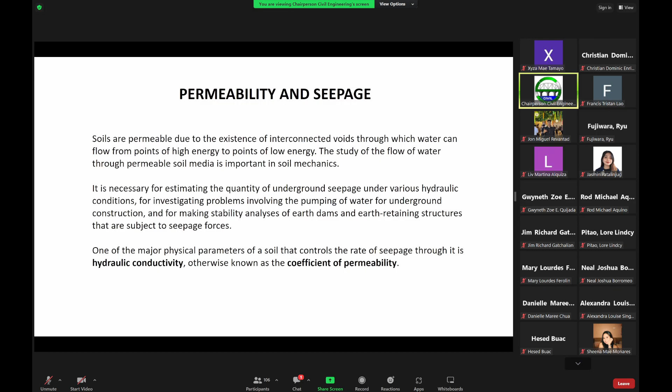Now, from fluid mechanics, we know that according to Bernoulli's equation, the total head at a point in water under motion can be given by the sum of three terms or parameters. It should be the sum of the pressure, velocity, and elevation heads, such that the total head H is now equal to the pressure head, the velocity head, and the elevation head.

So the pressure head is equal to the pressure over the unit weight of water. And then the velocity head is equal to the velocity squared over 2 times the acceleration due to gravity, plus the elevation head.

So again, if you have the book, I just copied this from the book, so you can refer to your book as well if you have difficulty with my presentation. I'm just practically going through the book as I speak. So here we have to take note that the elevation head Z is the vertical distance of a given point above or below a certain datum plane. For example, when we talk of ground elevations, when you did your surveying subject, normally the field ground elevations is based from the sea level as our datum plane.

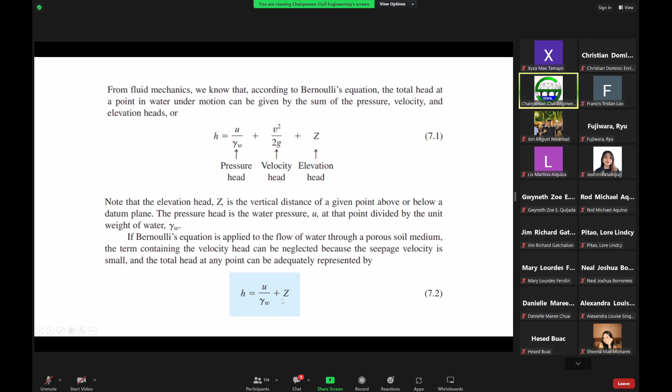So if you're talking of the ground, this is now the pore water pressure head over the unit weight of water, plus the elevation head.

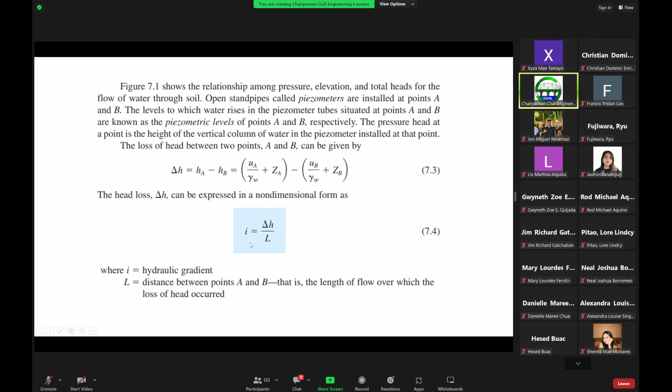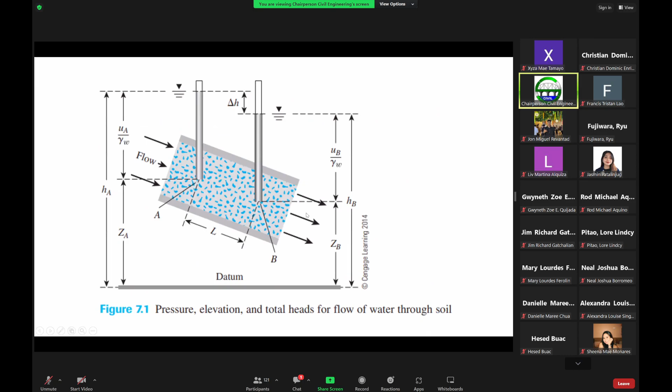When we say laminar flow zone, you can probably visualize this like a very calm creek that is flowing—that's laminar flow. When we say turbulent flow zone, you can imagine rivers where you have rocks and so on, where you have turbulent flow.

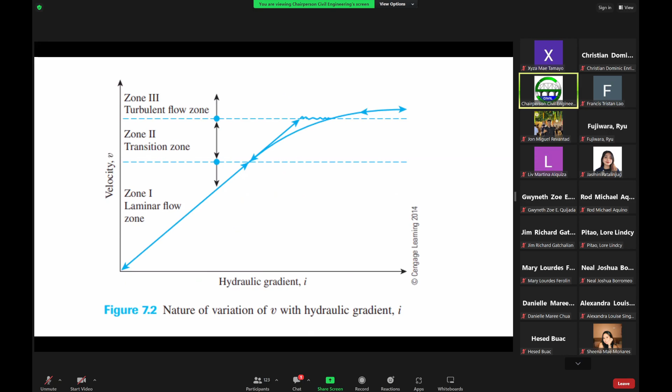Now, I think we learned from ratio and proportion that if we have the proportionality sign, and we replace this by an equal sign, then we have to introduce a proportionality constant. So that's why in this equation, if we want to relate the discharge velocity within the pores of the soils...

...if we equate the discharge velocity to the hydraulic gradient, recall that the hydraulic gradient is the ratio of the head loss over the length to which the head loss has occurred.

So V here is the discharge velocity, which is the quantity of water flowing in unit time through a unit gross cross-sectional area of soil at right angles to the direction of flow. And K here is what we call the hydraulic conductivity, or otherwise known as the coefficient of permeability. So these two terms are just the same.

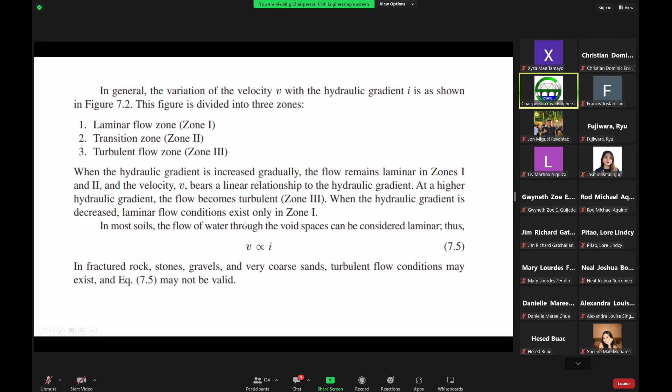So this equation is based primarily on Darcy's observation about the flow of water through clean sands, meaning it only has a minor percentage of fine content. So this equation here, equation 7.6 and equation 7.5, again take note, they are both valid for laminar flow conditions and are applicable for a wide range of soils.

So again, in this equation, the discharge velocity of water is based on the gross cross-sectional area of the soil—that's your V. However, the actual velocity of water, which is the seepage velocity, is not the same as the discharge velocity through the void spaces, and would be greater than the discharge velocity. Now, in fluid mechanics or hydraulics, you have the discharge velocity for your pipes.

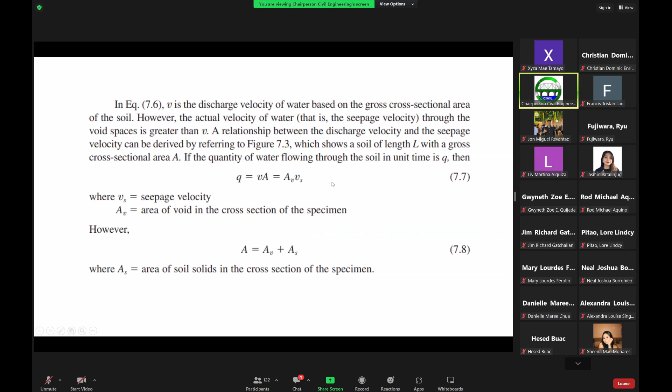If we now substitute this one here in this equation, then we get this one here, wherein the discharge velocity, or rather the flow rate, is now equal to the discharge velocity multiplied by the area of voids plus the area of the soil solids.

So that's this one here, but that is just equal to this term here, where that is now equal to the area of the voids times the seepage velocity. V sub S is again the seepage velocity.

So again, we are trying to get some relationship between the discharge velocity and the seepage velocity.

So if we now equate these two, then I can now cross multiply the area of voids here in such a way that I will now have this equation.

And then if I multiply everything by the length of the specimen, the area of voids times the length will now give me the volume of voids. And then the area of the soil solids multiplied by the length will give me the volume of soil solids. That's your V sub V and V sub S.

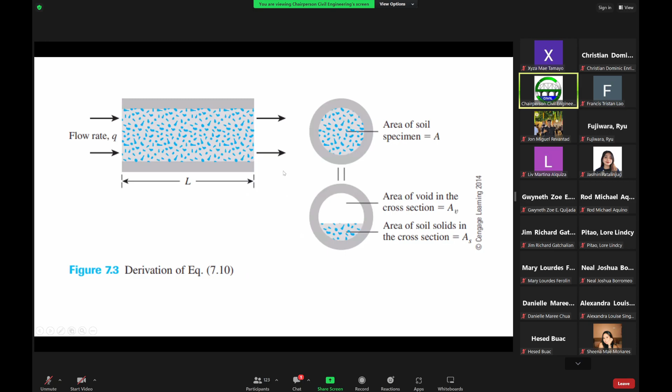And then the same here, the area of voids multiplied by the length L will now give you the volume of voids.

So then if we now look at this equation here, we now have the seepage velocity is now equal to the discharge velocity times this term here, in such a way that if we divide everything here by the volume of the soil solids,

this one divided by the volume solids will become 1. We have the volume of voids divided by the volume of solids over the volume of voids divided by the volume of solids.

Now, if we try to recall, the volume of voids divided by the volume of solids is now what we call the void ratio. So that means this term here can be replaced by the void ratio, in such a way that the seepage velocity is now equal to the discharge velocity times 1 plus the void ratio over the void ratio.

But again, if we try to recall the definition of porosity, the porosity is equal to the void ratio over 1 plus the void ratio. So it's just the inverse, reciprocal.

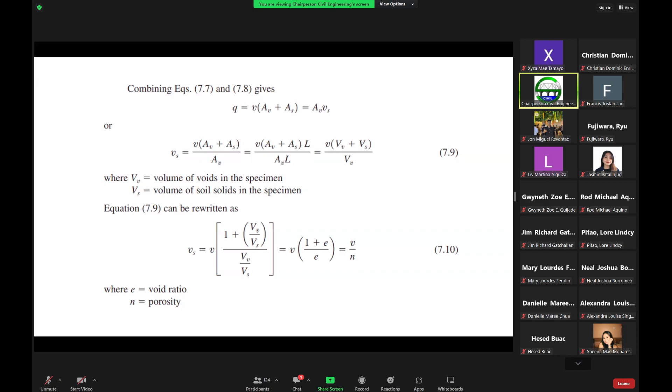So again, the porosity n is defined as the volume of voids over the total volume, whereas the void ratio is the volume of voids over the volume of solids.

Now, hydraulic conductivity, or coefficient of permeability, is generally expressed in units of centimeter per second, or meter per second in the SI units.

The hydraulic conductivity of soils depends on several factors. You can have the fluid viscosity and the pore size distribution, which can be derived from the grain size distribution. When I did my PhD work, we had a numerical approach such that if we have the grain size distribution, we can also predict the pore size distribution, wherein they will have the same type of curve for both the grain size and the pore size. It's also dependent on the void ratio as well as the roughness of the mineral particles.

If the particles are smooth, then you can have an easier flow of water, just like the rocks that you see in rivers. That's why you have those nice polished rocks, because the roughness there is already being polished by the flow of water, giving an easier flow.

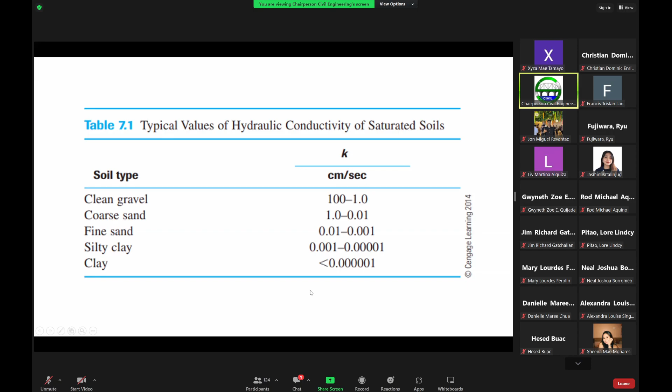Now, the hydraulic conductivity of unsaturated soils is lower as compared to the hydraulic conductivity of saturated soils, and it increases rapidly with the degree of saturation. That's why in this equation we incorporate a degree of saturation.

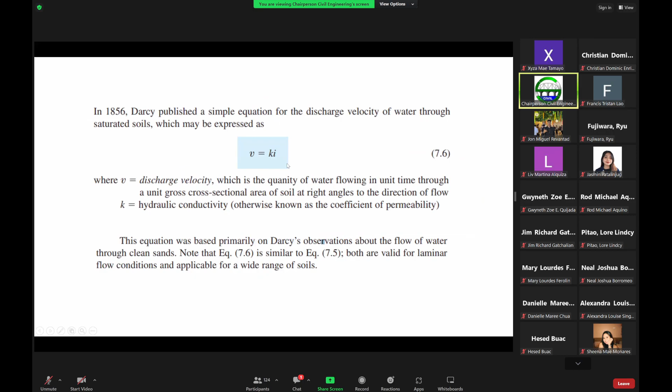It's good that I think in the latest version of the Principles of Geotechnical Engineering by Das, Das already slowly incorporated the concept, slowly introducing unsaturated soils. If you like, you can read a book on unsaturated soils, which is about 900 pages. I read it also during my PhD, where I read that book from cover to cover.

Now, the hydraulic conductivity of a soil is also related to the properties of the fluid flowing through it by this equation. That means the permeability is not only a function of the soil particles in the ground, but also the type of fluid that is flowing through it, for example water or oil. The equation is K equals the unit weight of water times capital K bar, where capital K bar is now referred to as the absolute permeability, expressed in units of L square, such as centimeter square, feet square, and so on. And then you have the viscosity of the fluid.

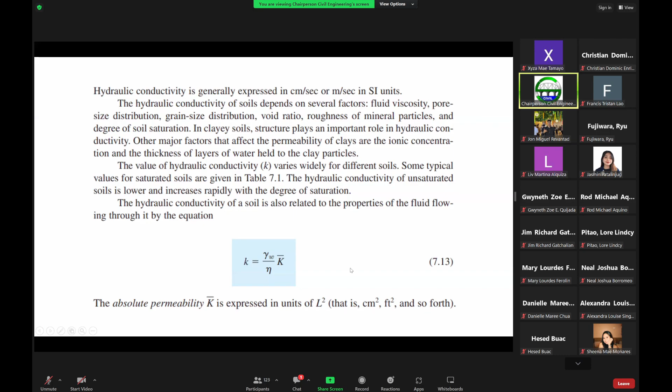Okay, now with respect to the lab, when we do a permeability test, we can either do the constant head test or the falling head test approach. I'm not sure if you have already done this in the lab, but I think you can do this. Now, in the case of a constant head test...

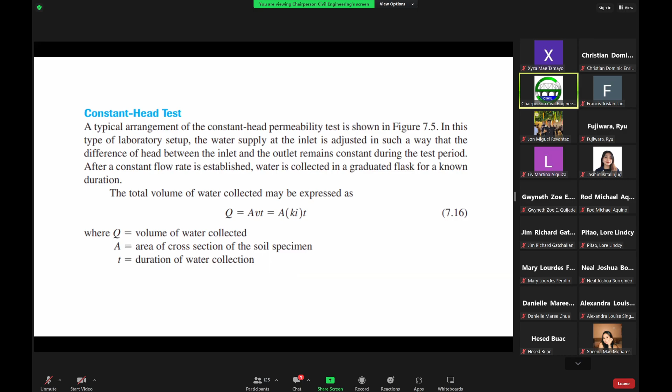But in this case, we don't give a constant supply of water, but we allow the water to flow from one level, then going down. So that means you now have a change in head, from H sub 1, which is now the initial level of water in the standpipe, and then at a certain time, it will now just become H sub 2.

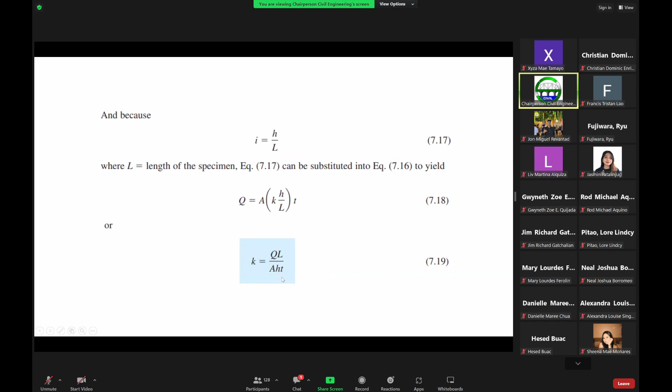Now, in actual practice, when we measure permeability, we also do what we call field permeability tests within the boreholes after drilling works. So we follow the falling head test approach, wherein we let the water go down with respect to time, and we measure the time. Then as time goes by, we measure the water levels, which we expect to be decreasing over time.

Then we measure it and apply the Hvorslev method to determine the field permeability. But the concept there, with respect to that Hvorslev approach, is basically the falling head test approach.

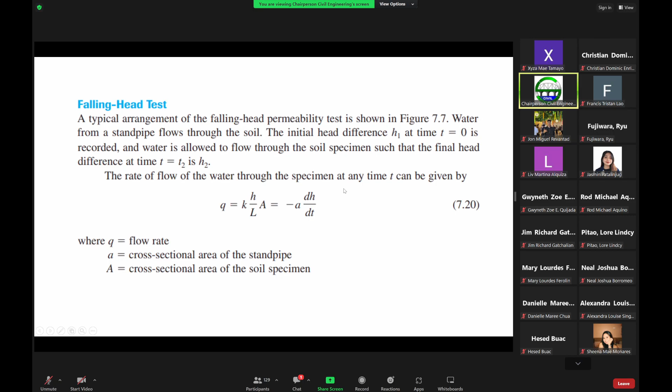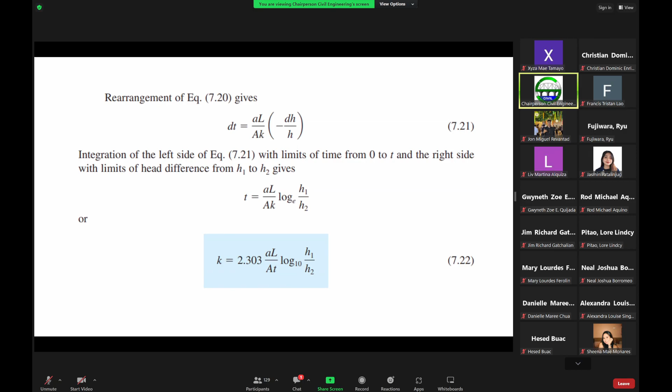So normally we do permeability tests in the field when we do geotechnical investigations, especially if we are trying to mitigate slopes, for example, wherein we can do some seepage analysis with respect to the slope.

Now we have a term which we call isotropic. When we say isotropic, that means the hydraulic conductivity with respect to the horizontal direction is roughly the same as the hydraulic conductivity with respect to the vertical direction, in the case of two-dimensional flow, because there's also what we call three-dimensional flow, or three hydraulic conductivities. For the moment, let's just consider two-dimensional groundwater flow with respect to isotropic conditions.

Now, most soils in nature are not isotropic. They are anisotropic with respect to permeability. For example, in a given soil deposit, the magnitude of K changes with respect to the direction of flow, such as in this soil specimen, wherein the direction of flow may not be strictly horizontal or strictly vertical, but there is an inclined flow, wherein the flow is inclined at an angle alpha from the vertical, not from the horizontal.

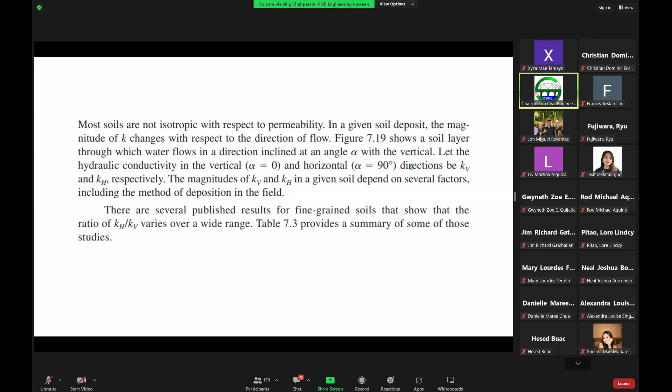So here, for example, we have some values for different KH, KV ratios for different soil types as researched by these people. Here we can see that the horizontal hydraulic conductivity seems to be higher or greater than the vertical hydraulic conductivity, such that in the case of organic silt with peat, if you use a value of 1.7, that means the horizontal hydraulic conductivity is about 1.7 times the vertical hydraulic conductivity.

For example, when you have varved clay in this situation, you can imagine the value there of 40. That means the horizontal hydraulic conductivity is about 40 times higher than the vertical hydraulic conductivity.

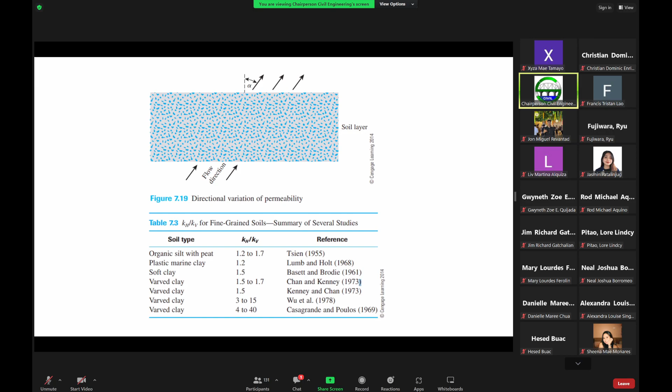As I mentioned earlier, in the Philippines, we normally have a stratified soil deposit, for example sands, clays, and then sands and clays again, and so on. We just finished a geotechnical report with such kind of stratified soil deposit, somewhere in Laguna, where the soil is basically a combination of sands and clays, with intercalations. So in a stratified soil deposit, the hydraulic conductivity for flow in a given direction changes from layer to layer. An equivalent hydraulic conductivity for this situation can be computed to simplify the calculations.

Now, the following derivations relate to the equivalent hydraulic conductivities for flow in the vertical and horizontal directions through multi-layered soils with horizontal stratification, a horizontal layering of soils. For example, this one here.

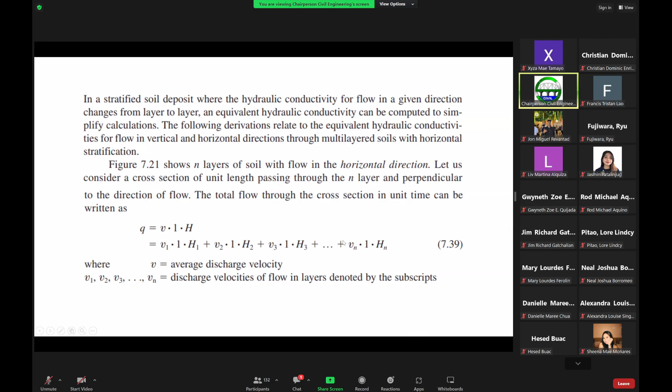Now, if KH sub 1 and so on until KH sub n are defined as the hydraulic conductivities of the individual layers in the horizontal direction, and K sub capital H EQ, or equivalent, is now defined as the equivalent hydraulic conductivity in the horizontal direction.

Then, as per Darcy's law, the discharge velocity is equal to the equivalent horizontal hydraulic conductivity multiplied by the equivalent hydraulic gradient, that's your I. But if we have multiple layers, this equivalent velocity is equal to the discharge velocities corresponding to each layer until the nth layer. And for the hydraulic gradient, the equivalent I is also equal to the hydraulic gradients for all the layers.

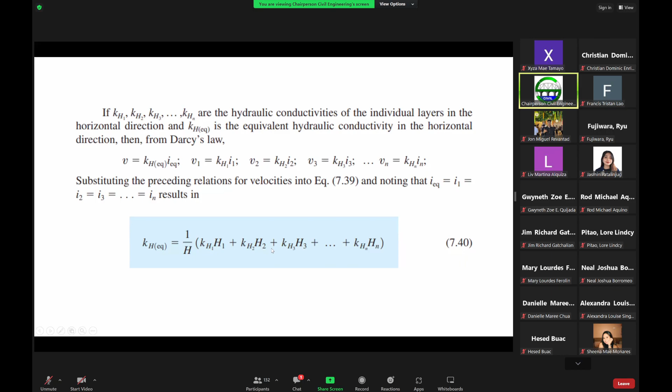Now, this time we again have the same soil layering, for example about 4 or 5 layers until the nth layer. But this time the direction of flow is not parallel to the layering of the soils - rather, the direction of flow is now vertical, which is perpendicular to the soil layering.

So in this case, we now have head differences, in such a way that if I put a piezometer here, this is now the height of my piezometric level. Then if I put a piezometer here, this is now my piezometric level, and so on. You notice that here it has a higher piezometric level compared to this point, because the direction of flow is coming from this direction going up.

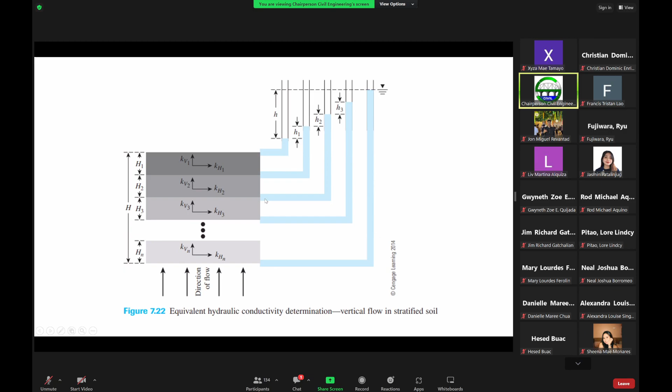So again, you have your H, and then H sub 1 until H sub n -- that's this one here, this is now your H, and this is now your H sub 1 until H sub n. That's your capital H. Then these are now the individual vertical hydraulic conductivities.

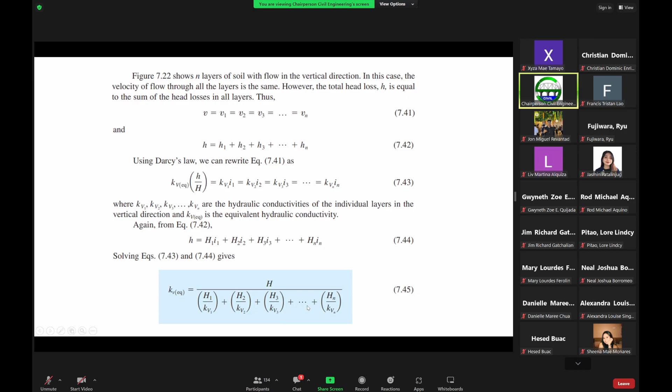So far we have been discussing water flows for stratified soil deposits, either in the horizontal direction as well as in the vertical direction. Now, in the field, we can also determine the average hydraulic conductivity of a soil deposit in the direction of flow by performing a pumping test from wells. If you have a water well, for example, we can do pumping tests there. I think the WRC, the Water Resources Center, does a lot of pumping tests to check the hydraulic conductivity in water wells, for example.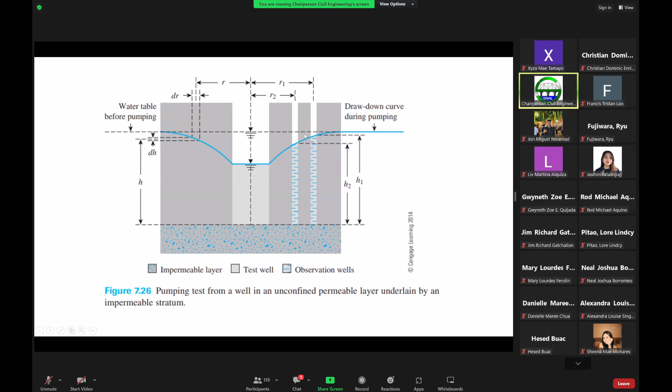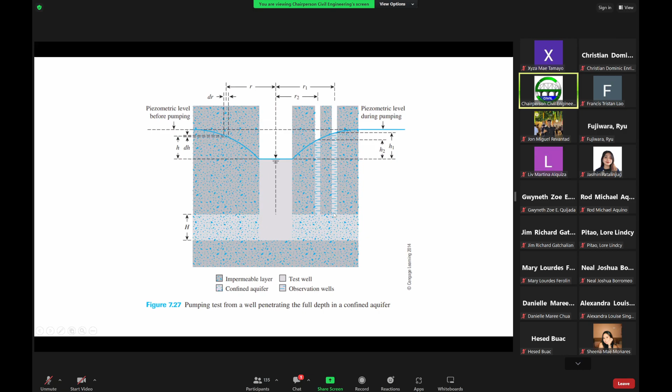So we just try to do some algebraic manipulations, and then we have here dr over r, that's the radial distance. Then here we just have R1 and R2 for the two observation wells. So by doing integration, wherein the limits are R1 and R2, as well as H1 and H2 for these two observation wells - these are now your limits of integration. So again, just doing some integral calculus, you will get this formula here for the hydraulic conductivity. Take note, that is in a confined aquifer medium, which is quite different from the unconfined aquifer.

So that means for you to apply these equations, it's really very important to do some geotechnical investigations, and then try to identify or distinguish the layers, the layerings in your ground condition, whether you're having an unconfined aquifer or a confined aquifer. Normally that can also be identified by hydrogeologists, such as myself. So basically I have two fields - hydrogeology as well as unsaturated soil mechanics, in geotechnical engineering.

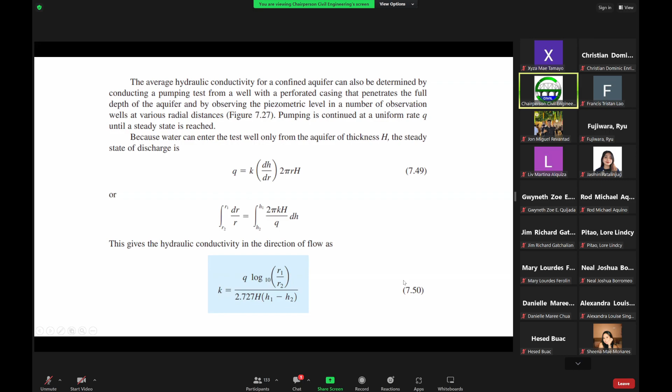So we normally focus on these topics in hydrogeology or geohydrology. So far, we have considered simple cases for which direct application of Darcy's law was required to calculate the flow of water through the soil. Now, in many instances, the flow of water through soil is not in one direction only, such as horizontal and vertical direction, nor is it uniform over the entire area perpendicular to the flow.

So in such cases, the groundwater flow is generally calculated by the use of graphs, which we now refer to as flow nets. Now, the concept of the flow net is actually based on the Laplace equation of continuity - if you still remember your subject in differential equations, we have the Laplace transforms. So here it's just the same - that's the Laplace equation of continuity, which governs the steady flow condition for a given point in the soil mass. So let us now try to arrive at this Laplace equation of continuity.

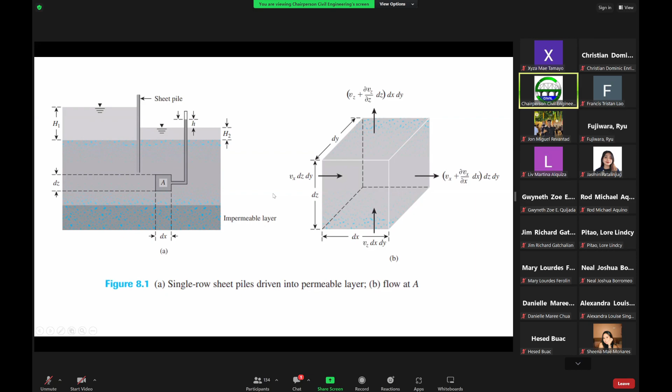Now, assuming that water is incompressible and that no volume change in the soil mass occurs, then we know that the total rate of inflow is equal to the total rate of outflow. We learned this in fluid mechanics. So this is now the total inflow, and this is now the total outflow, in such a way that if we now subtract this one here, then what is left is just this equation here.

Now, with Darcy's law, we can now replace these velocities here by the hydraulic conductivities as well as the hydraulic gradients, wherein the hydraulic gradient can be represented by the partial change of the head with respect to x as well as the partial change of the head with respect to z. That is now your x and z.

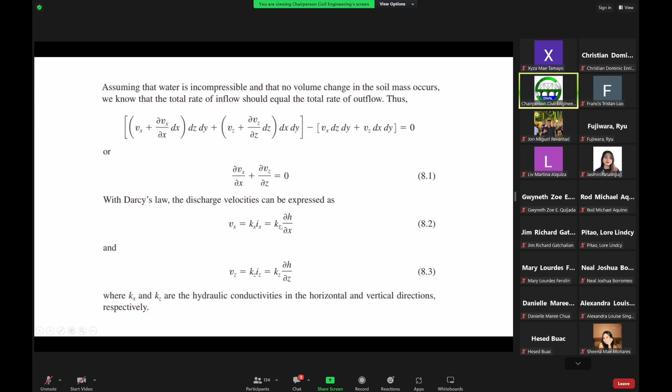So with that, if we now substitute this term and this term here in equation 8.1, that will now give us this equation 8.4. Take note, this is now the first partial derivative. If we substitute this one here, then we now have the second partial derivative with respect to x and with respect to z.

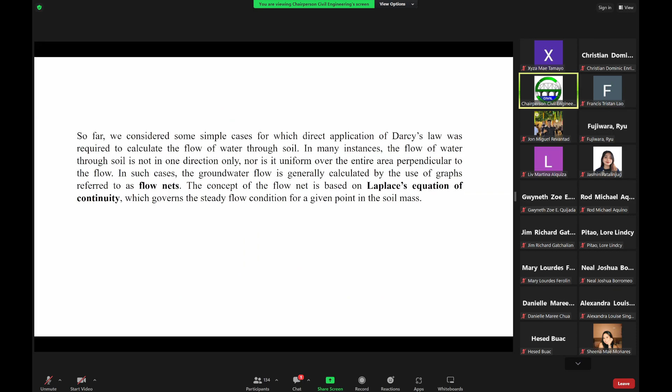This equation is considering that we have an anisotropic condition, wherein Kx and Kz are different. But if we have an isotropic condition, that is Kx and Kz are equal, then they are just the same, so we can divide everything by the same term. That means equation 8.4 is now simplified to equation 8.5, such as this one here. So this is now the Laplace equation of continuity.

Interpreting this equation now with respect to flow nets, the continuity equation in such isotropic medium, take note this is isotropic condition, now represents two orthogonal families of curves, if you still recall your differential equations.

We call these two orthogonal families of curves, but here in geotechnical engineering, these two orthogonal families of curves are now what we call the flow lines and the equipotential lines. A flow line is a line along which a water particle will travel from the upstream to the downstream side in the permeable soil medium, whereas an equipotential line is a line along which the potential head at all points is equal. Thus, if piezometers are placed at different points along an equipotential line, the water level will rise to the same elevation in all of those piezometers.

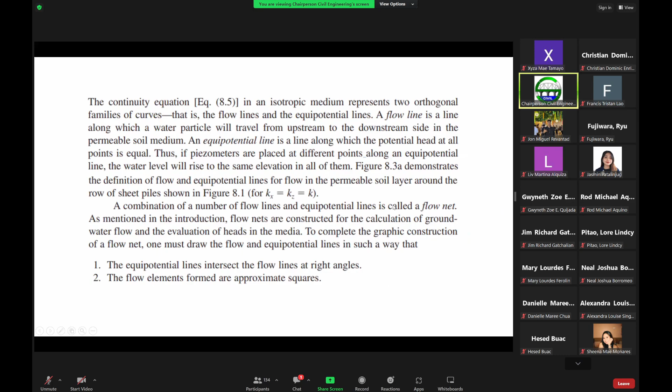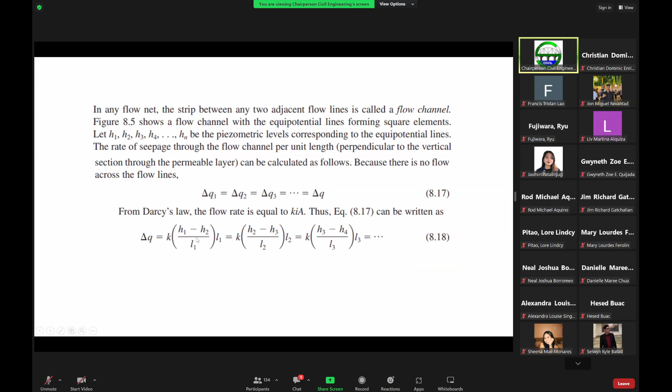That's your head loss here with respect to this length L.

After we have the flow elements, which we draw as approximate squares, we also have the drop in the piezometric level between any two adjacent equipotential lines, which are also considered the same. This is what we now call the potential drop. So the potential drop from H1 to H2 is just equal to the potential drop from H2 to H3, as well as the potential drop from H3 to H4, such that this is equal to the head difference between the upstream and the downstream side.

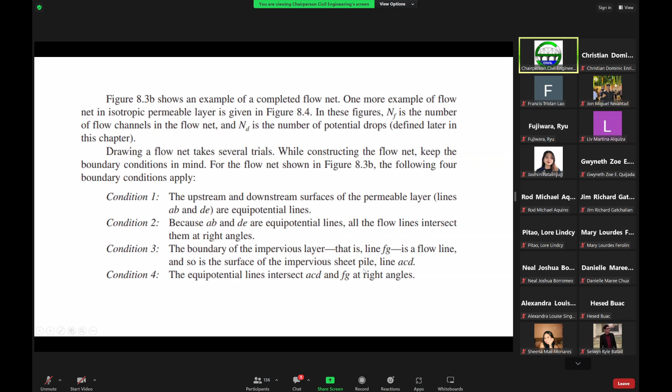If we now replace this in this equation, we now have delta Q equal to K multiplied by this term here, where ND is the number of potential drops. Going back to the figure, we now have six potential drops: one, two, three, four, five, and six. That's why your ND here is six. And then you have four flow channels: one, two, three, and four.

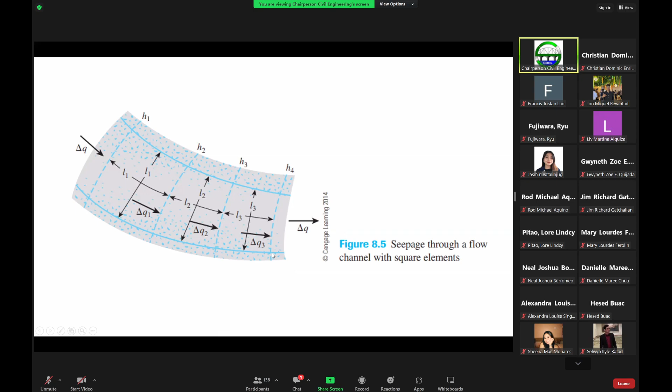So if the number of flow channels in a flow net, because this formula is only good for one flow channel, the total flow rate through all the channels per unit length can now be given by this equation, where we multiply the formula for one flow channel by the number of flow channels. For example, in this figure, we multiply it by 4, because the number of flow channels is equal to 4. That is how we derive the flow rate using a flow net.

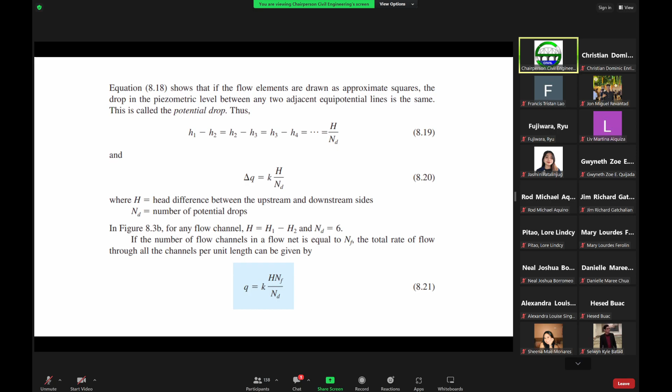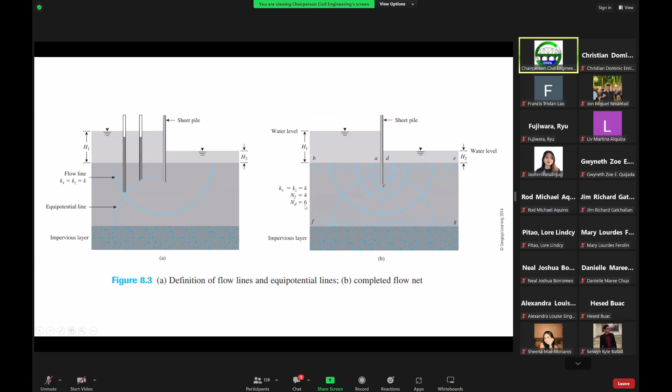Considering a flow net approach, if you try to draw it yourself, but in practice that's a bit tedious to do. So in practice, what we normally do is just use a software. For example, this one here is actually your sheet pile, the same example, but we just represent it and model it.

Okay, this is now a seepage model for an excavation, wherein you have water on top covering the ground surface. Then you need to do some excavation here, where this is your excavation depth. But in order for water not going into the excavation, we put some sheet piles, represented in the model as an impermeable layer. With that, you now have this flow net.

This is what you call your flow net, where these are your flow lines, and these are your equipotential lines intersecting the flow lines.

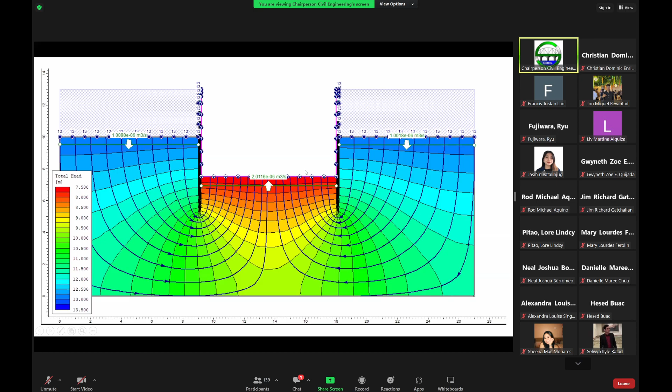So here we can see with the flow net that the direction of flow is from this direction going into this direction, so water will go out here. That's why in construction, after we have the sheet piles, we still make some pits on the sides, put pumps, extract the water and throw it outside so that level will become dry, then you can start constructing your foundations.

The reason we put pits on the sides is because of this: in the seepage analysis modeling, we can see the velocity vectors, showing the direction of flow of water, which is quite high in this part here. This is the discharge amount or discharge value at this level, which is just the sum of the discharges from this point and this point meeting here, giving the total discharge.

Now, this discharge rate, if you know this one, can be the basis for your pumps. When you buy a pump, it should have a pumping capacity higher than the discharge, the water discharge coming out from the ground, in order for you to make this embedment depth dry.

During working, in actual construction, we make sure that the pumps we buy should not break down, because you can imagine if there are people working here and you have water going out all the time, if the pumps break down this will become a swimming pool covering all the workers. So we always prepare spare pumps, because if the pumps break down we immediately put in the other pumps.

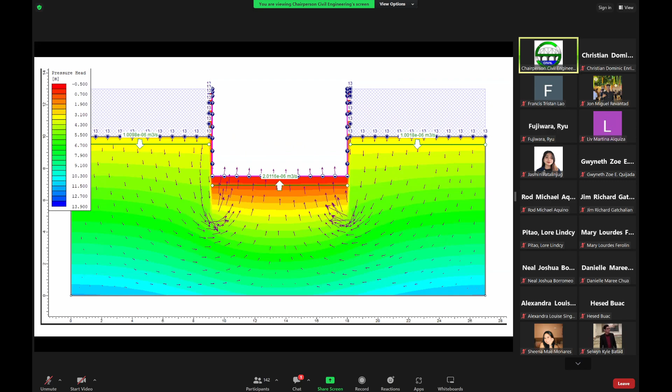Okay, I guess that's the end of my discussion. So let's have some examples here. We have about 15 minutes left, I think.

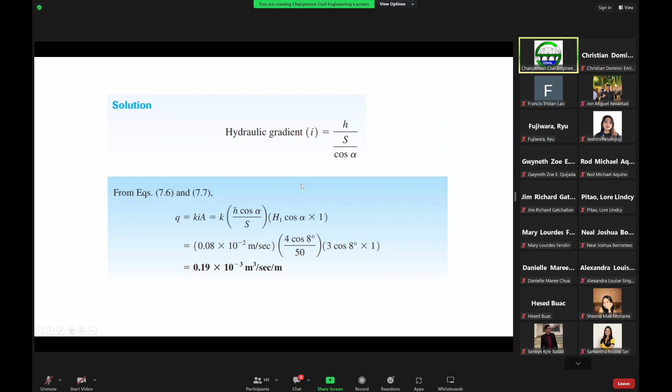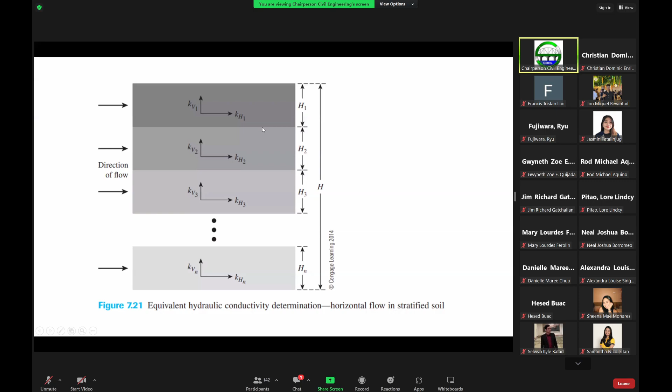In this case, we are having an isotropic material because we are only given K1, K2, and K3. That means the vertical and horizontal hydraulic conductivities are just the same, just like this figure here. So we're having a problem like this, wherein we are given the H values and the K values. In that problem, KH and KV are just the same, so we are having an isotropic medium.

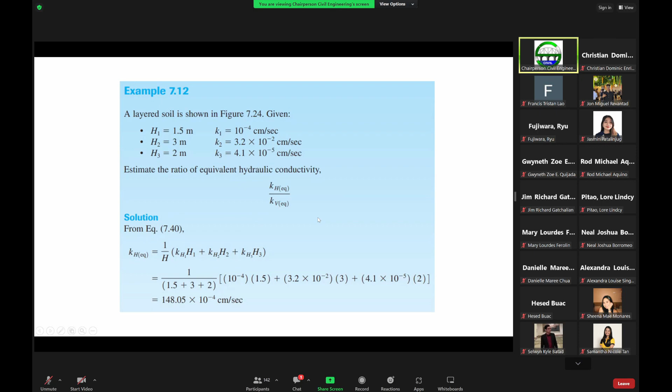So with that, for the equivalent hydraulic conductivity, we just follow this formula as given earlier, and substitute these values here, then we get the equivalent hydraulic conductivity. Now for the vertical hydraulic conductivity, again given these parameters, we simply substitute the given values, wherein K sub V is just equal to K, because K sub V and K sub H are equal in this isotropic medium case. So substitute the values, and we get the value for the equivalent vertical hydraulic conductivity.

So to get the ratio now, we just simply substitute this value here and this value here, and this is now the ratio of the equivalent hydraulic conductivity. So I guess this is the end of my slide.

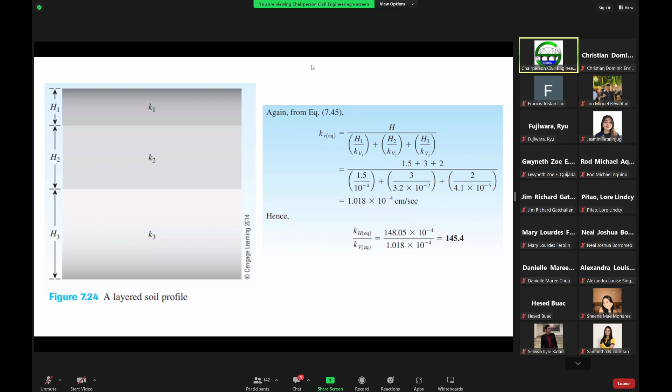So again, in actual practice, we already use software. We use software to do seepage analysis.

Yes, there seems to be a question here. Is a soil with a high level of seepage a good thing or a bad thing? Okay, this is a very good question. It depends on your goal.

For example, in the case of construction, wherein you have the groundwater level above the excavation depth, then a soil with a high seepage level, or high hydraulic conductivity or high permeability, may be a bad thing. Because we need to buy large pumps just to remove water in order for us to have a dry platform. So in that case, it may not be a good thing.